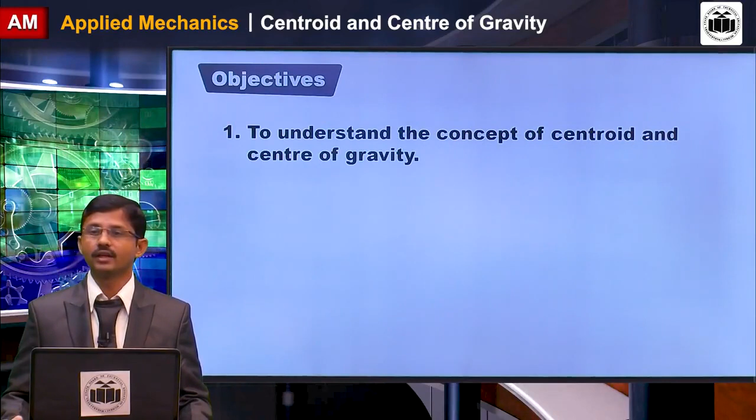The learning objectives of this topic are to understand the concept of centroid and center of gravity, then calculate the centroid of different composite lamina, then calculate the center of gravity of different composite solids.

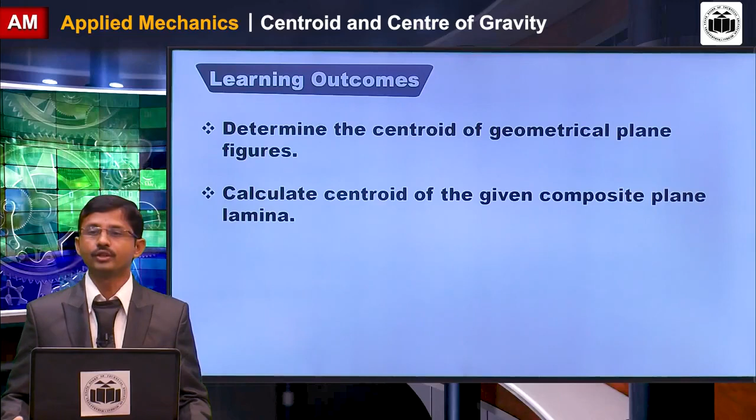The learning outcomes of this topic are: determine the centroid of geometrical plane figures, calculate the centroid of given composite plane lamina, determine the center of gravity of given solids, and determine the center of gravity of given composite solids.

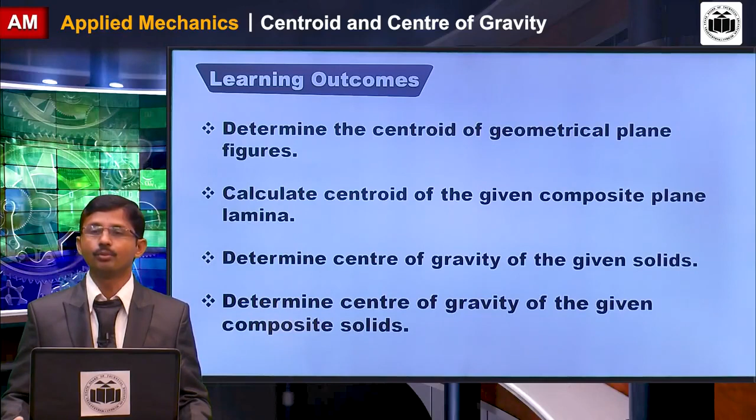The utility and relevance of this unit with respect to real life include children playing seesaw in the garden, a man balancing his body on a wire rope, elephants standing on a ball in the circus, and a boat balancing in the water.

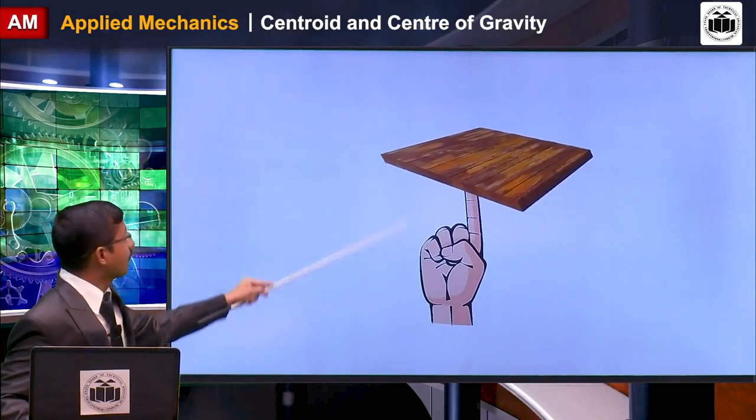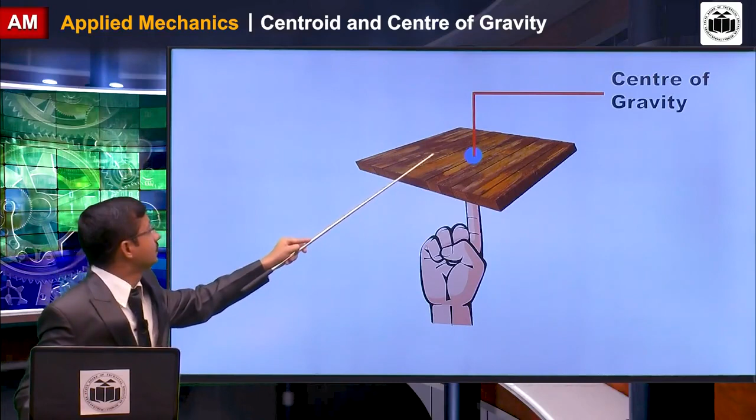For utility relevance, if you consider a cardboard and try to balance it on your fingertips, it will move left and right, and it will balance at a particular point. That point is called the center of gravity of that particular cardboard.

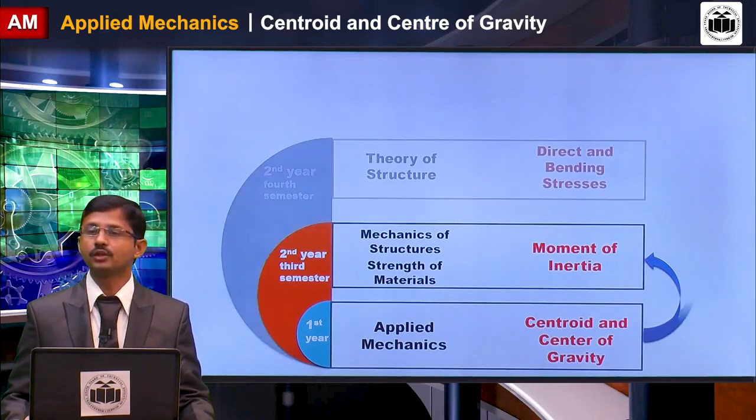The relevance of centroid and center of gravity is important for solving problems on moment of inertia in mechanics of structure and strength of materials. This topic is also important for calculation of direct and bending stresses, slope and deflection in theory of structures, and for stability analysis of structure in design of steel and RCC structures.

The prerequisites of centroid and center of gravity are: in mathematics, you should know the calculation of area and volume; in applied mechanics, you should know the force system, resolution and composition of forces, and equilibrium is also important as a prerequisite for this.

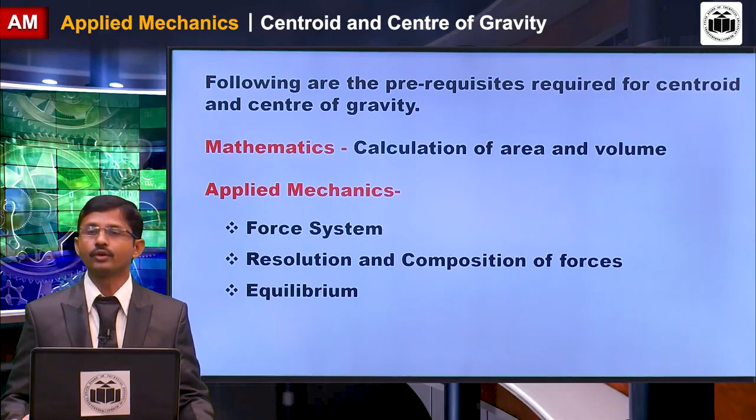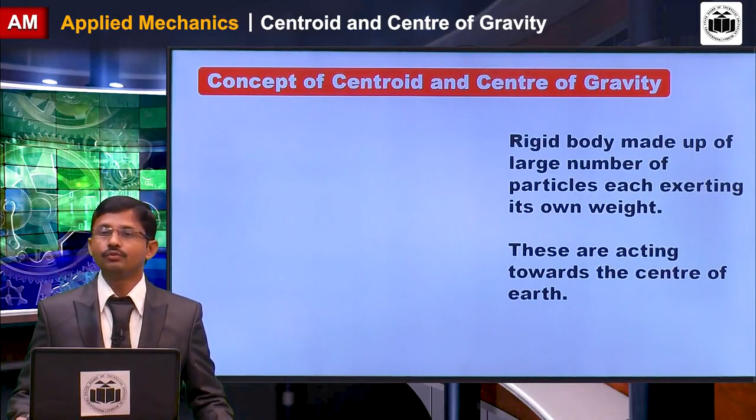Now we will discuss the concept of centroid and center of gravity. If you consider an irregular shaped lamina having a number of particles exerting its own weight, these weights act towards the center of the earth. If you calculate the resultant of all these particles, you get a point where the resultant of all the weights is concentrated.

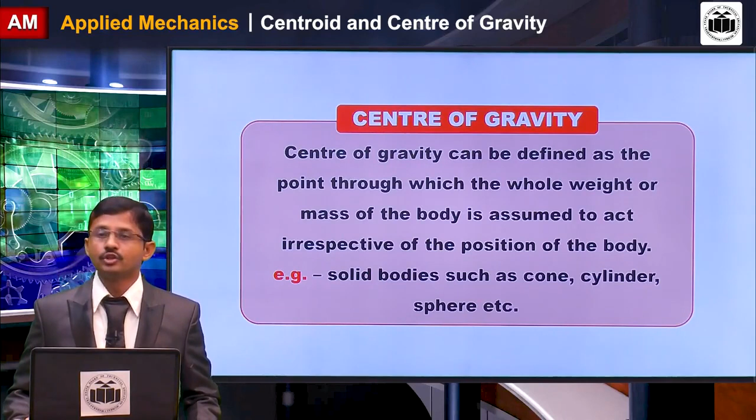So this point is called the center of gravity of that particular irregular shaped lamina. We can define center of gravity as the point through which the whole weight or mass of the body is assumed to act, irrespective of the position of the body. That is called center of gravity. Solids such as cone, cylinder, and spheres are examples for center of gravity.

After center of gravity, the next point is centroid. Centroid is the point at which the entire area of the plane figure is assumed to act for all positions of the lamina; it is called centroid or center of area. So if you take...

...a plane lamina, this is a rectangle having plane lamina. Why is it called plane lamina? Because it has two dimensions, B and D, and the thickness is very negligible. So the weight of this particular rectangle is very negligible, hence we have to find out the centroid of this particular rectangle.

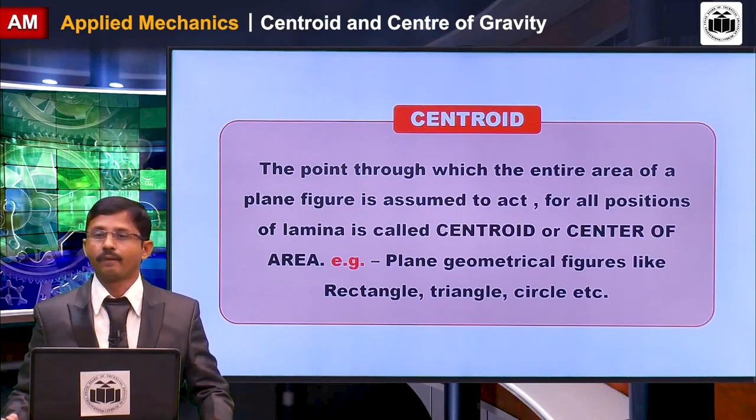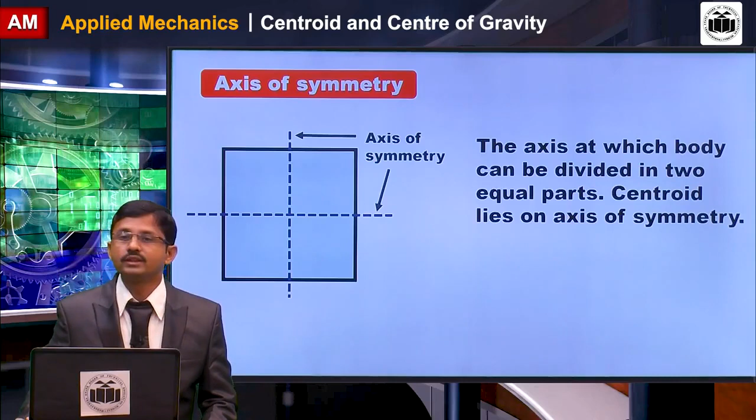So we will move to the next important point, that is axis of symmetry. The axis of symmetry is: if you take a plane lamina, like this rectangle, and divide it into two equal parts, then the centroid of that rectangle acts exactly on the symmetry of that section. Here we have shown the axis of symmetry for that. This concept is very important to locate the centroid of a particular lamina.

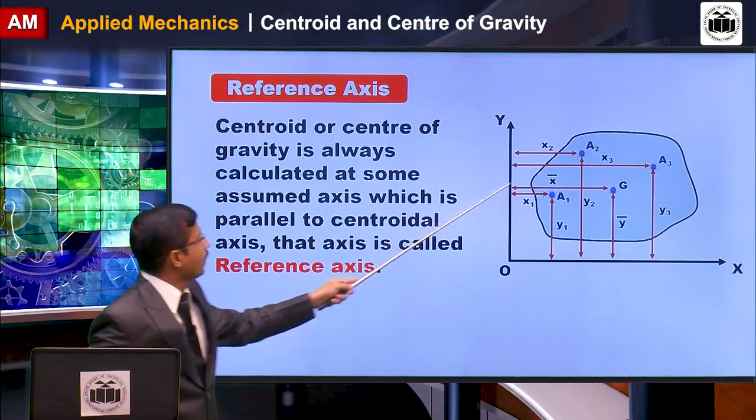Now we will discuss the reference axis, which is also important. In this, you have to assume OX and OY as the reference axes, and from that reference axis you have to calculate X bar and Y bar for individual figures as well as composite figures. This reference axis is very important for locating the centroids.

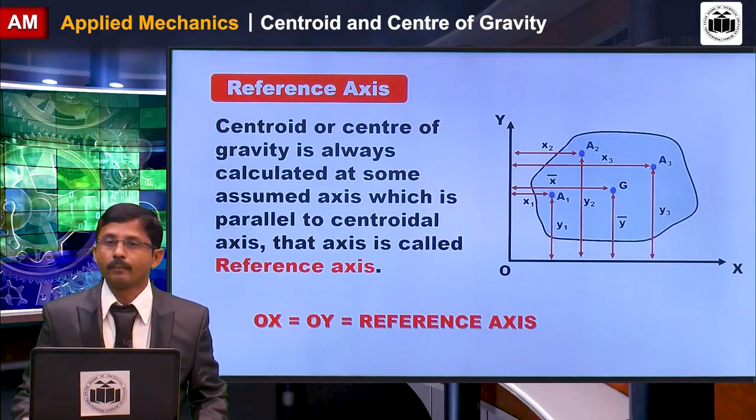Now we will discuss some geometrical figures, formulas for the geometrical figures. So the first is the rectangle. Rectangle is having two dimensions, B and D. If you multiply B into D, you will get the area, and its centroid is located at a distance B by 2 and D by 2 from the rectangle for X bar and Y bar respectively.

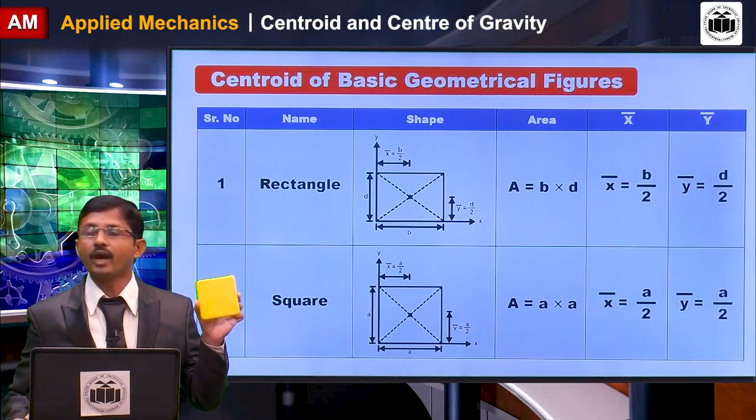Then we will discuss regarding the square. Square is having two same dimensions, A, and both the dimensions are A. So you can find out the area as A into A, and its X bar and Y bar is also same, that is A by 2.

So the next figure is a triangle. Triangle is having area 1/2 base into height, and the X bar is located at a distance B by 3 from the Y axis and H by 3 from the base.

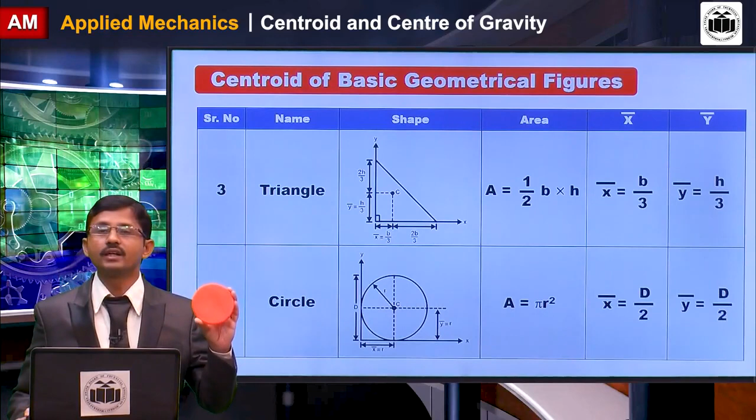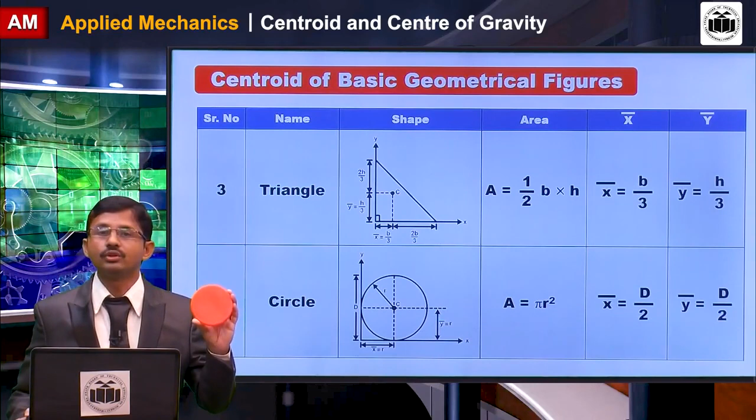Then the next important figure is a circle. The area of this particular circle is pi r square, and you can calculate the X bar and Y bar. This is symmetrical about both the axes, hence its value is D by 2, that is the diameter. D is nothing but the diameter of the circle.

Students, do you have any question? Yes, sir, I have one question. Differentiate between centroid and center of gravity.

So it is a nice question. Centroid is defined for a plane lamina having two dimensions, and center of gravity is defined for a body having three dimensions, that is length, breadth and depth. So in centroid, the total area of that particular figure is concentrated at a point. In case of center of gravity, the total weight or mass of that particular body is concentrated.

We will move forward for centroid of composite plane figures. For this you have to consider two axes OX and OY as the reference axis, and draw an irregular shaped plane lamina, considering three areas. First area is A1, with distance x1 from Y axis and y1 from X axis. For area A2, the distance is x2 from Y axis and y2 from X axis, and for A3 it is x3 from Y axis and y3 from X axis.

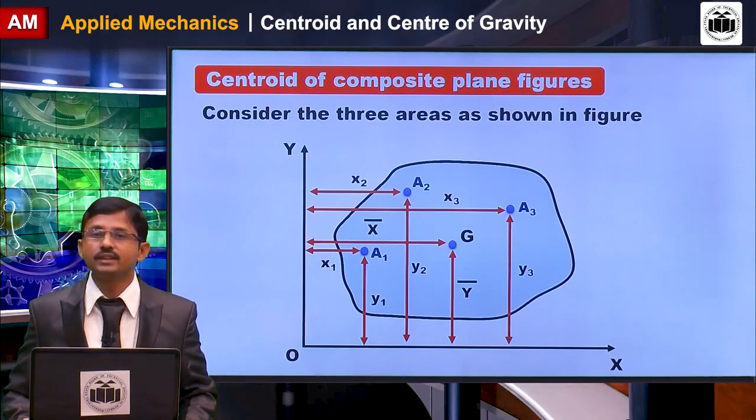Using this particular lamina, you can find the centroid of that plane lamina as x bar from Y axis and y bar from X axis. For this calculation, the reference axis is important, and using this we derive the equations for x bar and y bar. So we have discussed A1, A2, A3, x1, x2, x3, and y1, y2, y3.

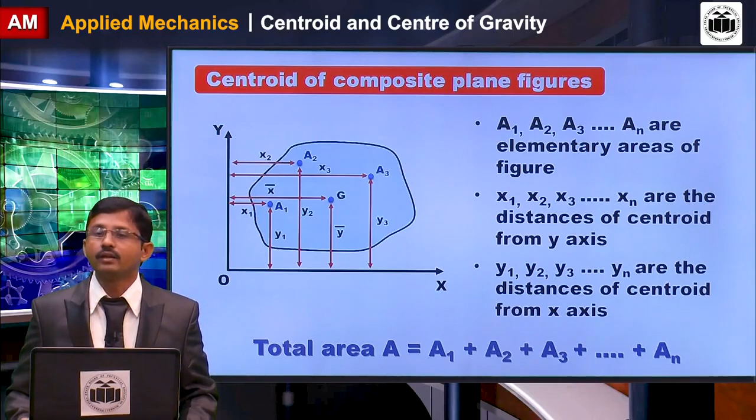Then you can calculate the total area A1, A2, A3 up to AN, and using Varignon's theorem, that is algebraic sum of the moment of individual areas about any axis of reference is equal to the moment of composite area about the same axis. Taking the moment along OY axis, you get x bar as A1 x1 plus A2 x2 plus A3 x3 up to AN xn, divided by total area.

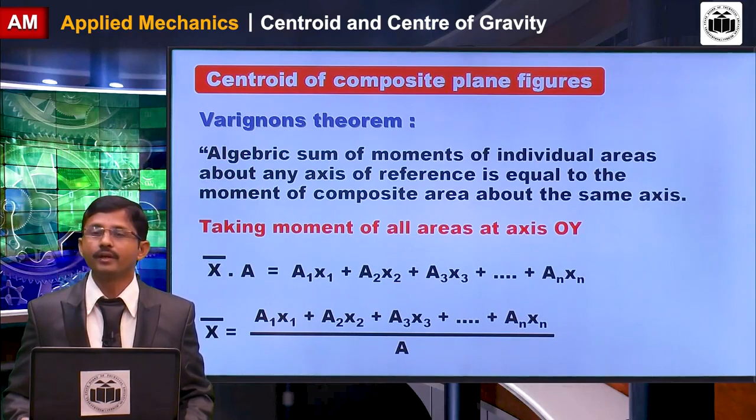Then taking the moment along the OX axis, you get y bar as A1 y1 plus A2 y2 plus A3 y3 up to AN yn, divided by total area. Using these two equations, centroid of composite plane figures can be found out.

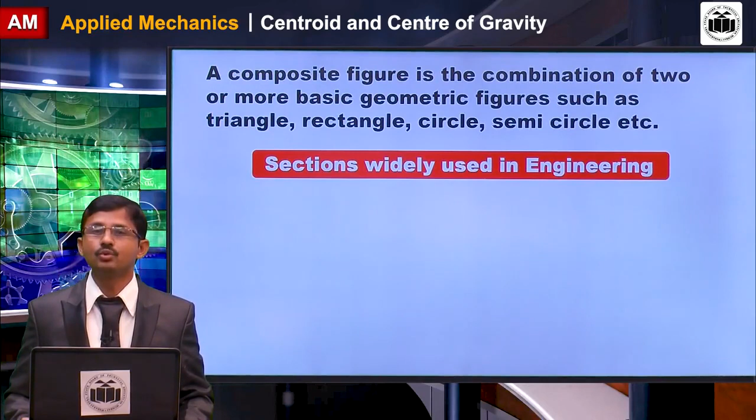Now we will discuss composite figures. These are nothing but the combination of more basic geometric figures such as rectangle, triangle, circle, semicircle. Some of the composite figures widely used in engineering are equal angle sections, unequal angle sections, equal and unequal I sections, channel sections, T sections, and trapezoidal sections for retaining wall, gravity dam, and earthen dams.

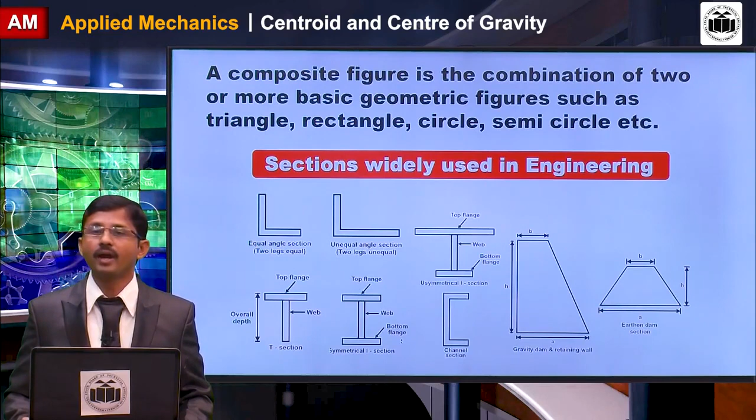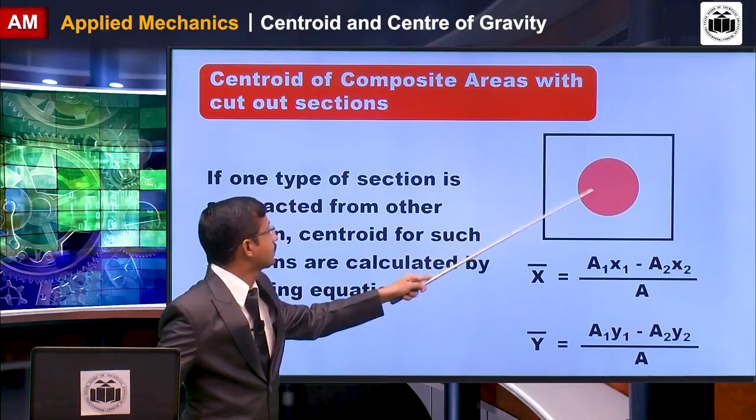Then we will move forward for centroid of composite areas with cut sections. A cut section is when a smaller area is subtracted from a bigger area. Centroid of such sections is calculated using the equation: x bar equals A1 x1 minus A2 x2 divided by total area, and y bar is A1 y1 minus A2 y2 divided by total area. Here you have to remember to subtract the area of the circle from the rectangle, so the second term in the equation should be negative.

Students, do you have any question? Yes. How to calculate the centroid of cutout sections?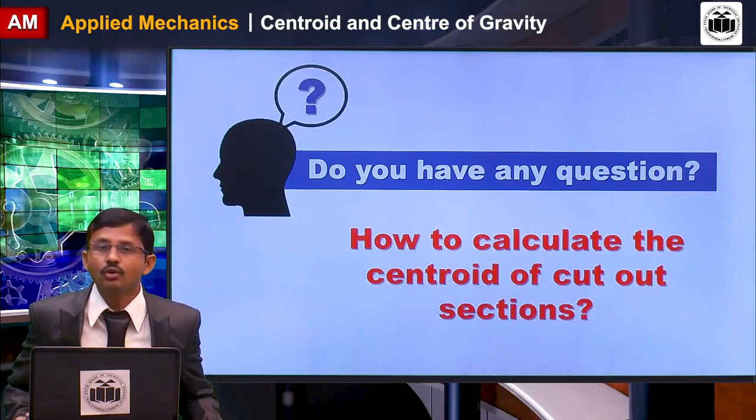So it is a nice question. Cutout section is nothing but we are subtracting a smaller section from bigger sections. So at the time of calculation of centroid, the moment of smaller section is considered as negative. You have to subtract the moment of smaller section from the bigger section, and you will get the centroid of cutout sections. I think you understand the answer. Thank you.

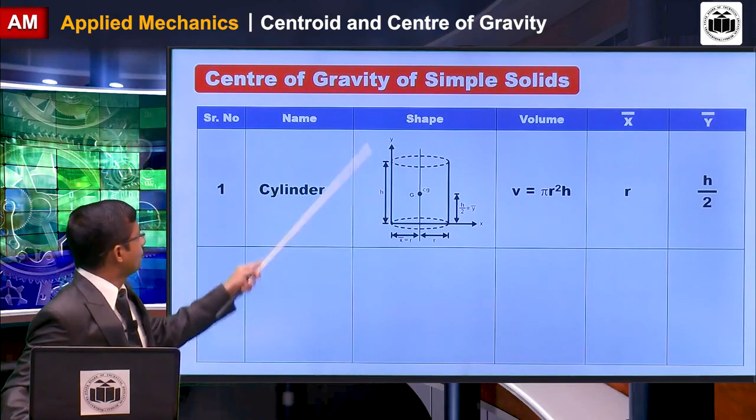So students, now we will discuss center of gravity for simple solids. Our first solid is a cylinder. It is having 3 dimensions, so area is there and height is there. For this you have to calculate the volume. The volume of this cylinder is pi r square h, and the x bar for this cylinder is r from the y axis, and y bar is h by 2 from the x axis.

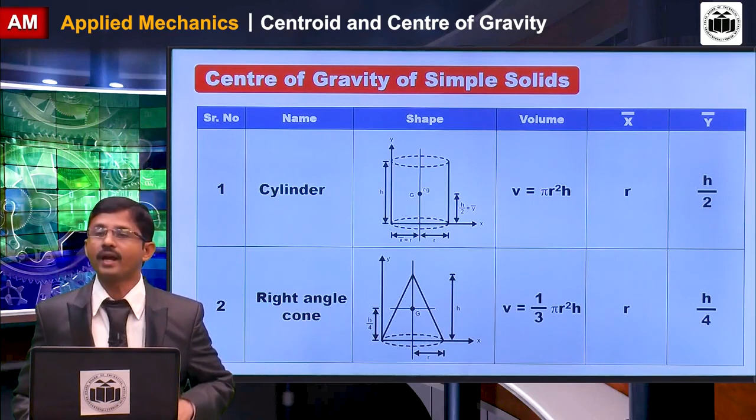Then next is a right angle cone. This cone is having a circular area at the bottom and there is a height. So volume of this cone is calculated as 1/3 pi r square h. The x bar of this cone is r from the y axis, and the y bar is h by 4 from the x axis, and r is the x bar from y axis.

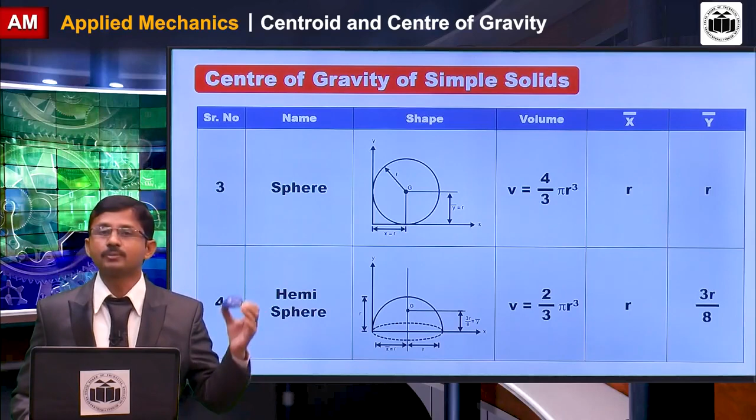Then hemisphere. Hemisphere is nothing but it is the half of the sphere. So the volume of this sphere is 2 by 3 pi r cube, and the x bar of this particular sphere is r from the y axis, and from the x axis the y bar is 3r upon 8.

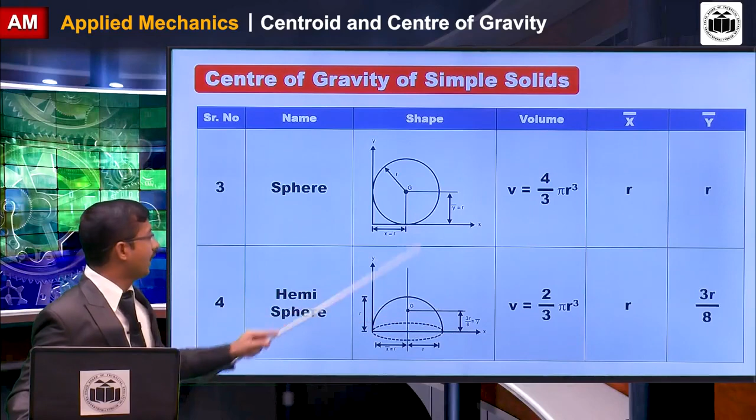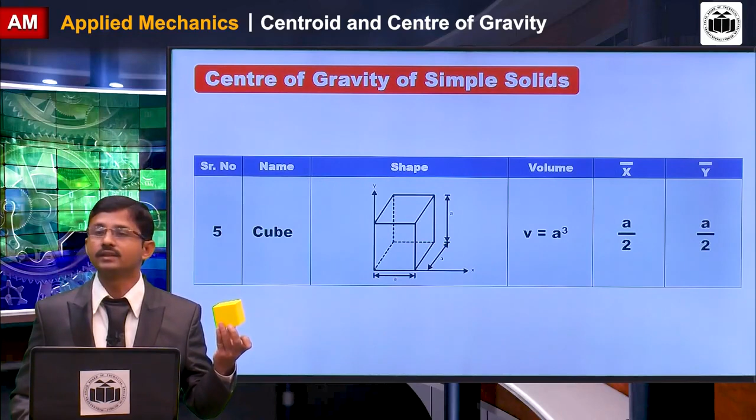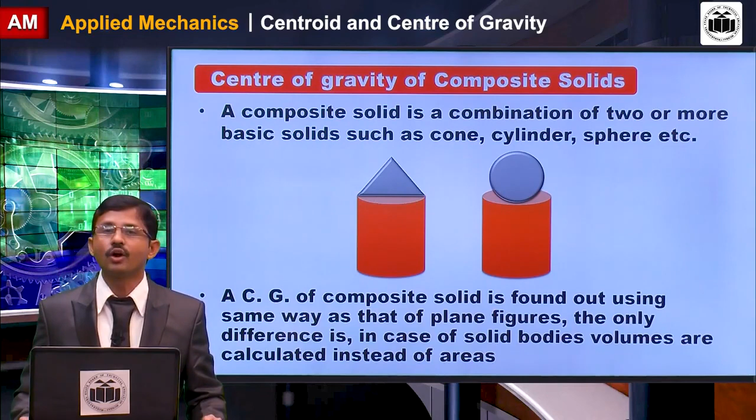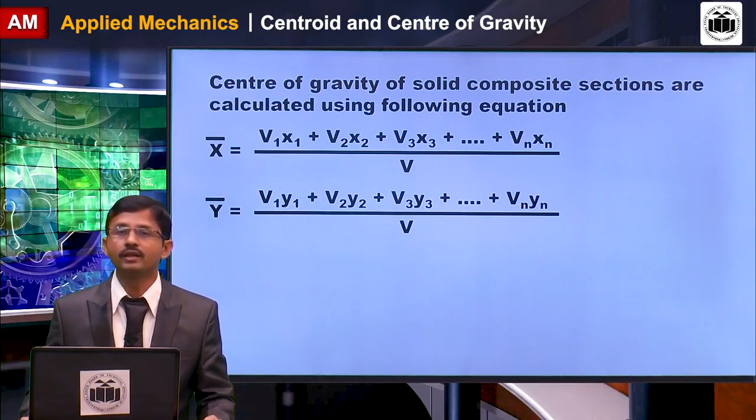This can be calculated, that means center of gravity of composite solids is found out using the same way as that of plane figures. The only difference is in case of solid bodies, volumes are calculated instead of areas. So the center of gravity of solid composite sections are calculated using equations: x bar is equal to v1 x1 plus v2 x2 plus v3 x3 up to vn xn divided by total volume. Then y bar is equal to v1 y1 plus v2 y2 plus v3 y3 up to vn yn divided by total volume. So v1, v2, v3 are the elementary volumes of the figure, and x1, x2, x3 are the distances of CG from y-axis; y1, y2, y3 are the distances of CG from x-axis.

So here you have to consider volume. In centroid we are considering the area. So we can calculate total volume V is equal to V1 plus V2 plus V3 up to Vn.

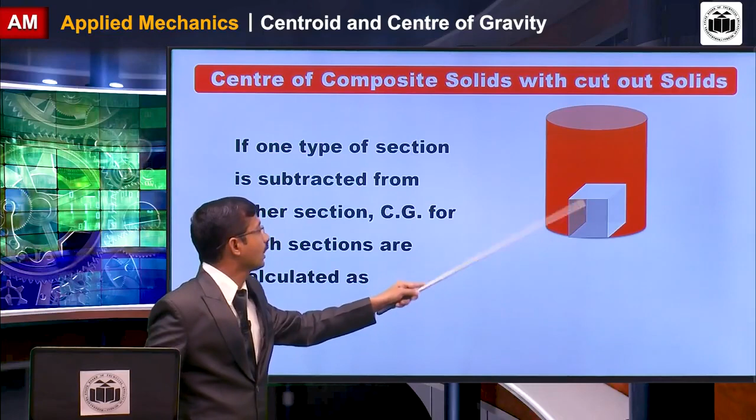Then we will discuss center of gravity of composite solids with cut out solids. So we have to discuss the cut solids. That means what you have to do: there is a cylinder, and from this cylinder you have to subtract or remove this particular cube. So this is called cut solids.

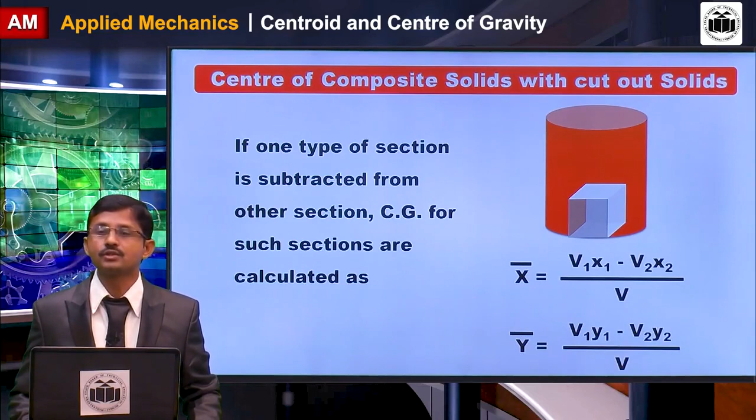So if one type of section is subtracted from other sections, the CG for such sections are calculated using the following equations. x bar can be calculated as v1 x1 minus v2 x2 divided by total volume, and y bar can be calculated as v1 y1 minus v2 y2 divided by total volume. Here in the second term, what you have to do is subtract V2 x2 and V2 y2 because we have to remove this particular cube.

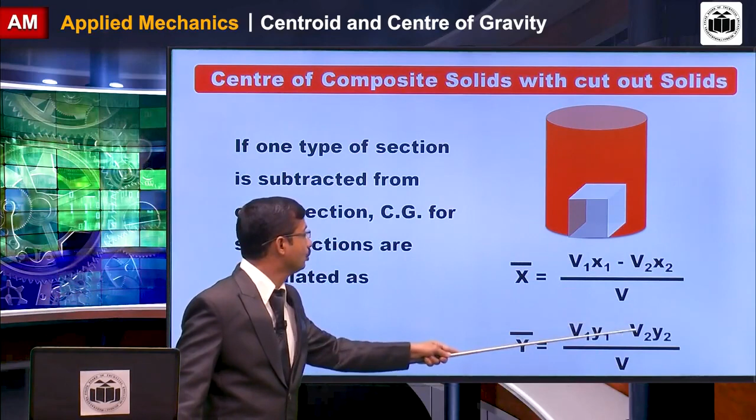Students, do you have any question? Yes, sir, I have one question. What do you mean by frustum of a cone?

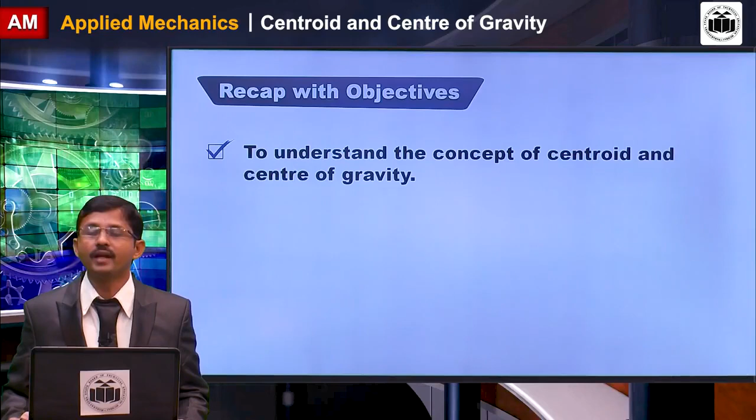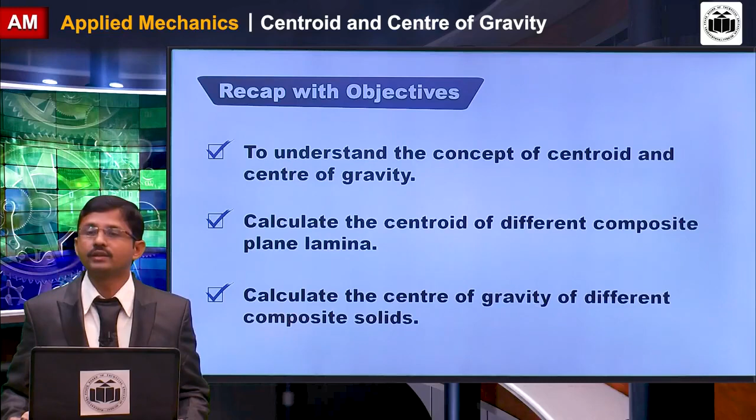So students, we have covered these objectives. First, to understand the concept of centroid and center of gravity. Then we have calculated the centroid of different composite lamina. Then we have seen how to calculate the center of gravity of different composite solids. So students, now you are fully competent to solve the problems of centroid and center of gravity.

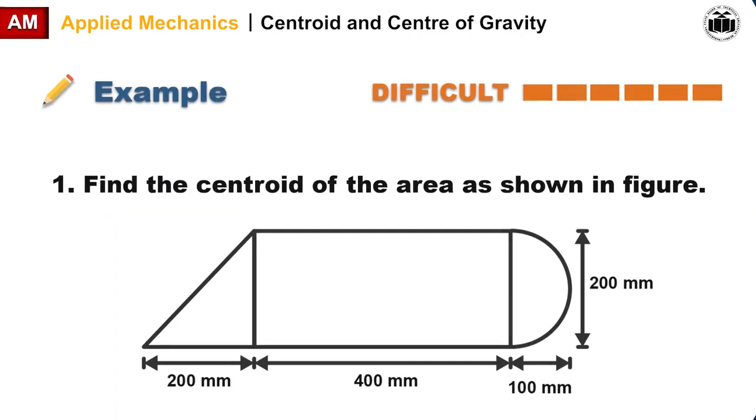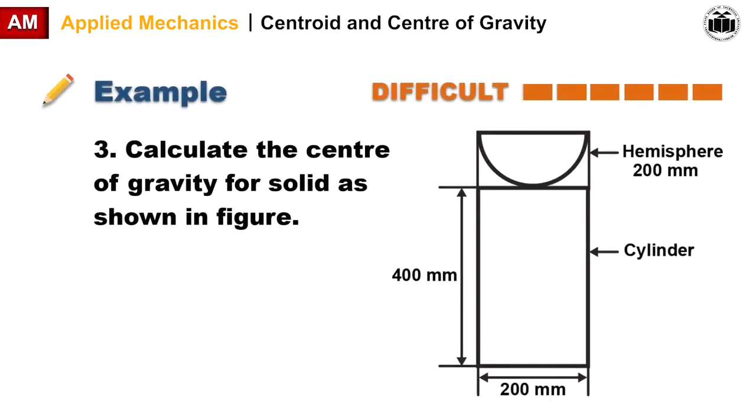So a worksheet is given below. Try to solve it. The solutions of the worksheet are provided for cross verification.

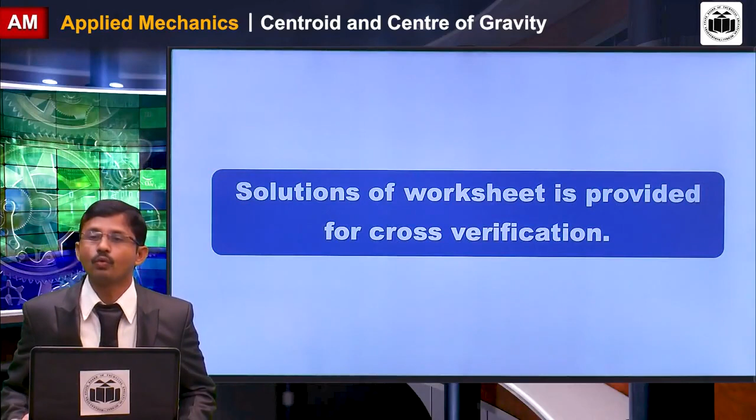Let's see the solution of this particular problem. First of all, you have to convert this composite figure into three diagrams, that is triangle, rectangle and semicircle.

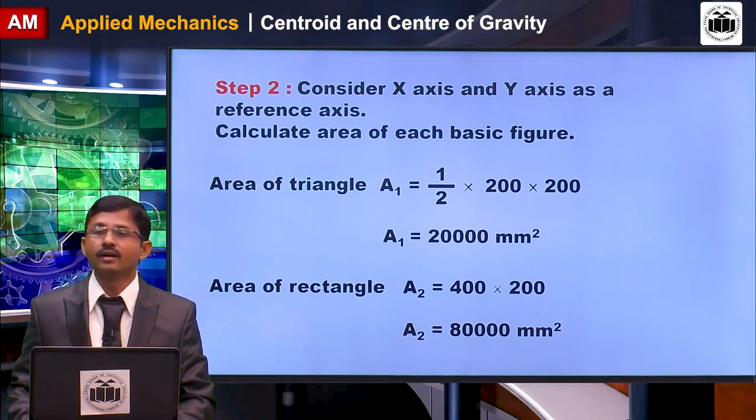Then consider x and y axis as the reference axis and calculate the areas for triangle, rectangle and semicircle using the basic formulas. Calculate the area of the composite figure, that is A1 plus A2 plus A3.

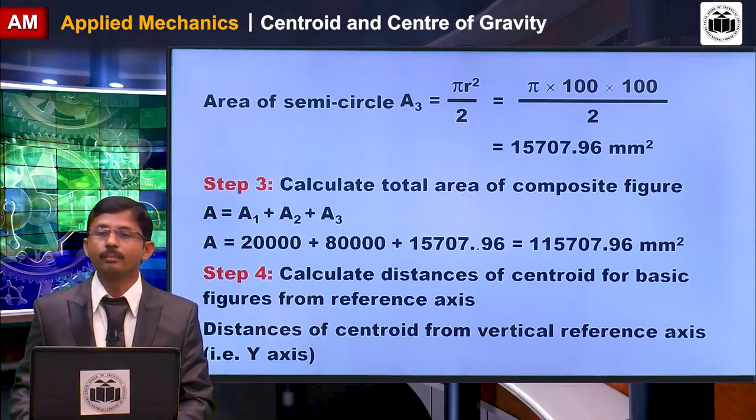Then you have to calculate the distances of centroid for basic figures from the reference axis. This particular step is very important for this problem because students are making mistakes while calculating x1, x2, x3. So here x1 is nothing but the CG of this particular triangle from the y-axis.

So x1 is calculated as 200 minus h by 3. Then you calculate x2, so this x2 is 200 plus 400 divided by 2, that is the CG of this individual rectangle.

Then you have to calculate x3. So x3 is calculated as 200 plus 400 plus 4r upon 3 pi. So this 4r upon 3 pi is nothing but the centroid of the semicircle.

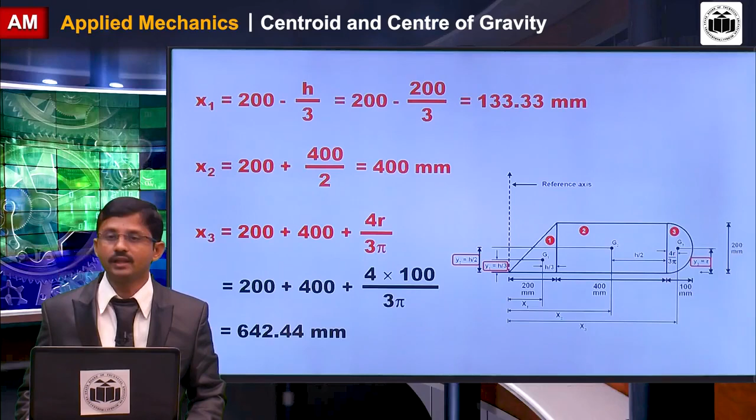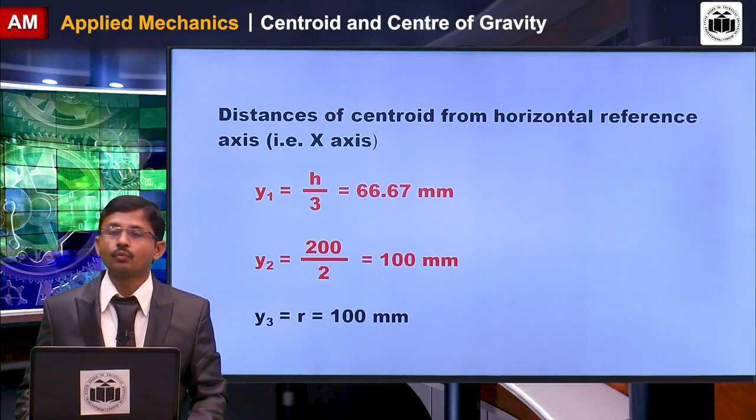So from this you will get x1, x2 and x3. Then you have to calculate the distances of centroid from the x-axis, that is y1 as h by 3 for the triangle, y2 is 200 by 2, and y3 for the semicircle where radius is equal to 100 mm.

Then you have to calculate the centroid of the composite figure from the y-axis, that is x bar, using the equation a1x1 plus a2x2 plus a3x3 divided by area. After doing the calculations you will get x bar as 386.822 mm from the y-axis. So you have to do the calculations properly on the calculator so there won't be any mistake.

Then we have to calculate the centroid for the composite figure from the x-axis, that is y bar, using this equation, and you will get y bar as 94.24 mm from the x-axis.

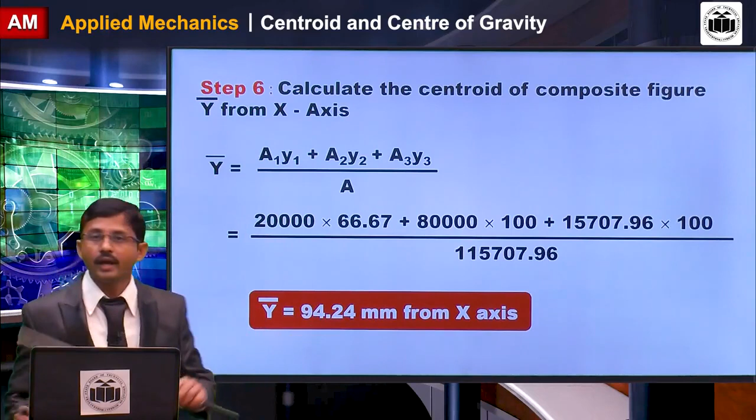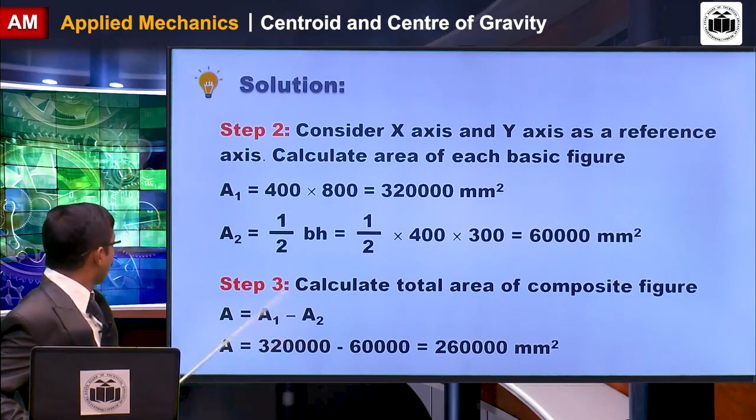So after considering x and y axis, you have to calculate the areas A1 for rectangle and A2 for triangle. Then calculate the area of the composite figure. Since this is a cutout section, you have to subtract A2 from A1, so you will get the total area.

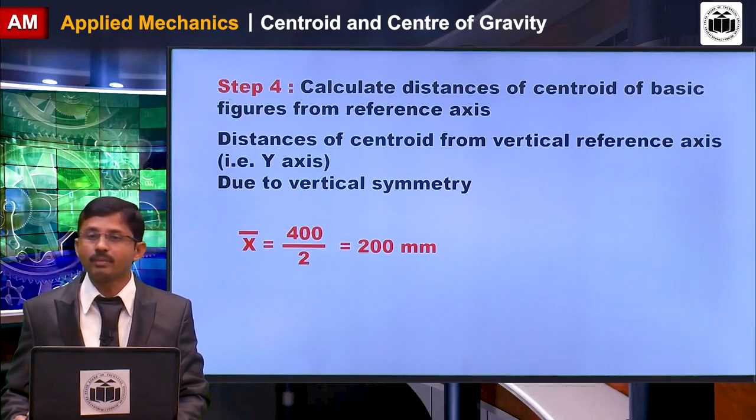Then calculate the distances of centroid from the y-axis. Due to symmetry, since this diagram is symmetrical about the y-axis, x bar is calculated as 400 by 2, which is 200 mm. This is the axis of symmetry, so directly you get x bar as 200.

Then you have to take care in calculating y1 and y2. y1 is considered as 800 divided by 2 from the base, and y2 is calculated by subtracting h by 3, that is 1 by 3 into 300, so that is 100, from 800, giving y2 as 700.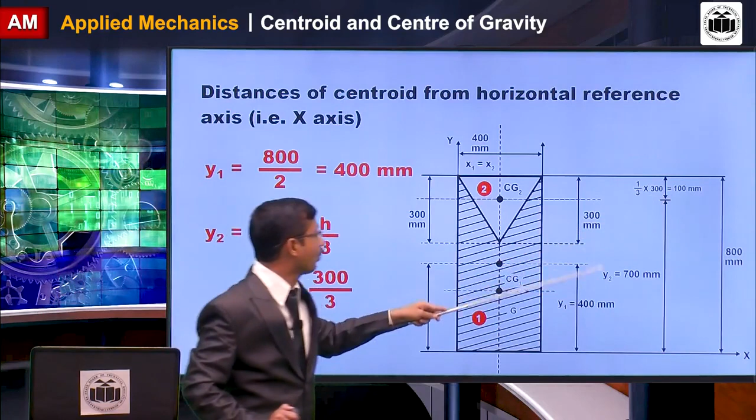Then you have to calculate the centroid of the composite figure from the x-axis, that is y bar, equal to a1 y1 minus a2 y2 divided by area. So you will get y bar as 330.77 mm.

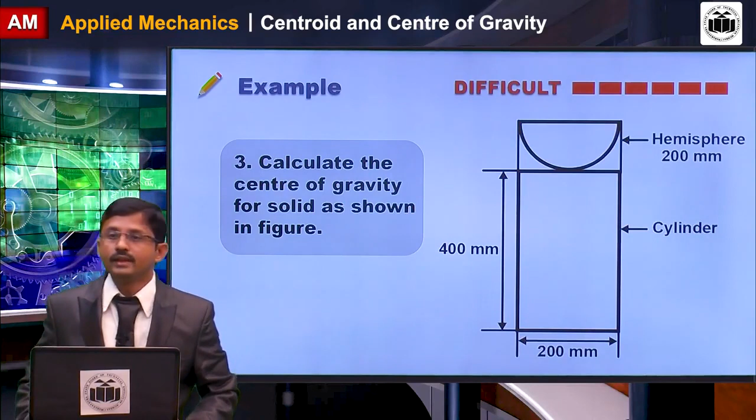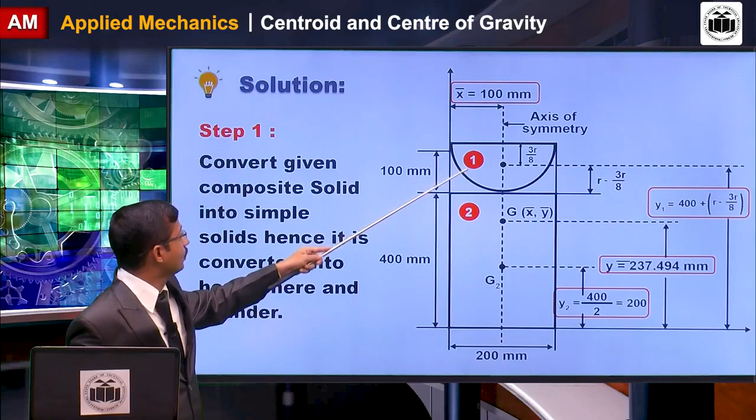Then we will see the next problem. It is having composite sections, that is one is a cylinder and second is a hemisphere kept inverted on the cylinder. So you have to convert this figure into two parts, that is part 1 is hemisphere and part 2 is a cylinder.

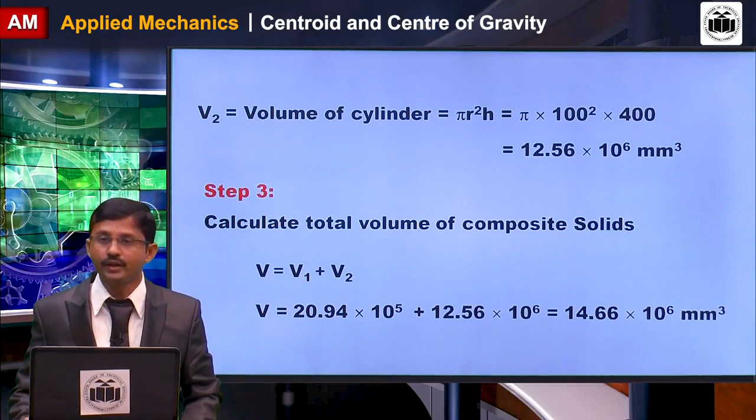So this is a problem of solid sections. Here you have to calculate the volume of hemisphere, that is 2/3 of pi r cube. Then you have to calculate the volume of cylinder as pi r square h. Then you have to calculate the total volume of composite solid, it will be V1 plus V2, and you will get the total volume.

Then the next important step is you have to calculate the centroid of individual figures and composite figures. Here there is an axis of symmetry parallel to the y-axis, hence your x bar will be directly obtained as 200 divided by 2, that is 100 mm.

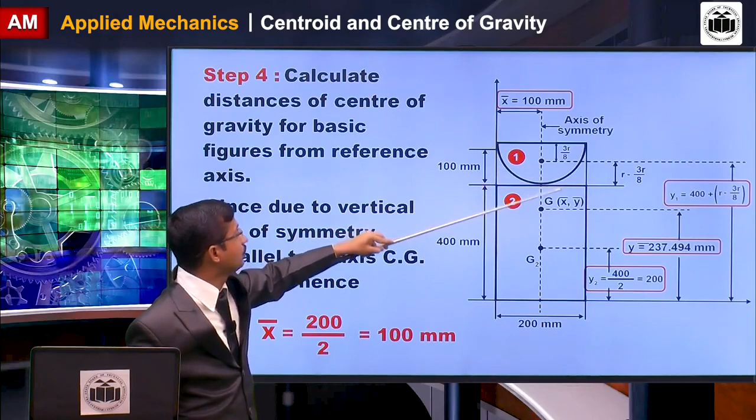Then we can calculate the distances of the hemisphere, this is the distance we have to find out, so this is y1. y1 from the x-axis we have to find out as 400 plus, what we have to do here, you add r minus 3r upon 8. So CG from the base for hemisphere is 3r upon 8, hence total y1 you will get as 400 plus r minus 3r upon 8.

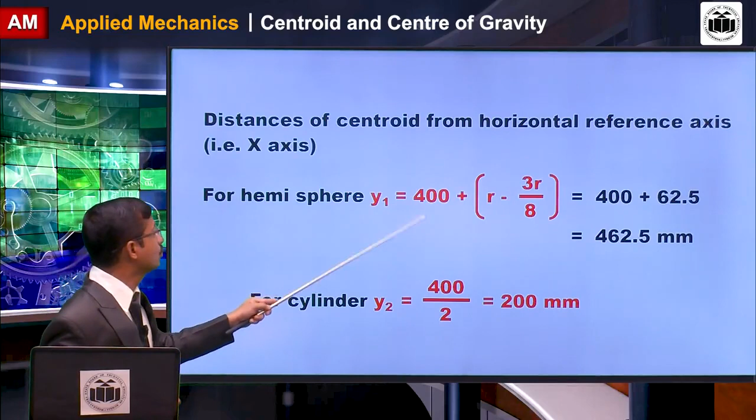Then you have to calculate y2 as total 400 divided by 2. In this problem, this particular term is very important, that is 400 plus r minus 3r upon 8. Here the students are doing mistakes, so you have to be careful at the time of calculation of y1 and y2.

After that you can calculate the y bar from the x-axis, that is V1 y1 plus V2 y2 divided by total volume. So you will get the y bar as 237.5 mm.

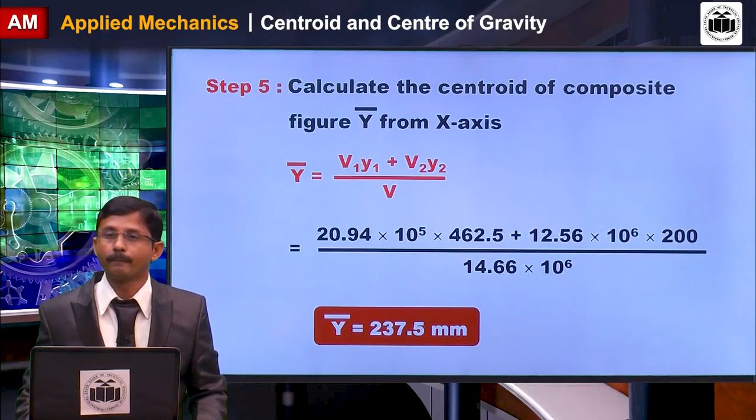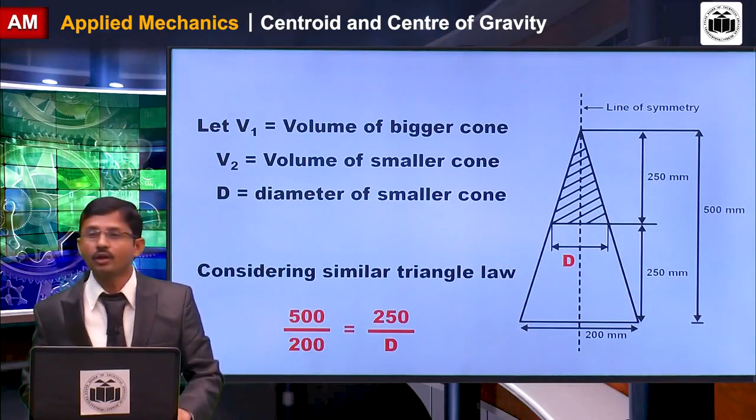Before calculation of V1 and V2, first of all you have to calculate this particular D, using the similar triangle law, that is 500 divided by 200 is equal to 250 divided by D. You will get the diameter of the smaller cone as 100 mm.

Then you can calculate the volumes of the bigger cone, that is 1/3 pi r square h will be the volume of the bigger cone, and you can calculate the volume of the smaller cone similarly, that is 1/3 pi r square h, and you will get the total volume.

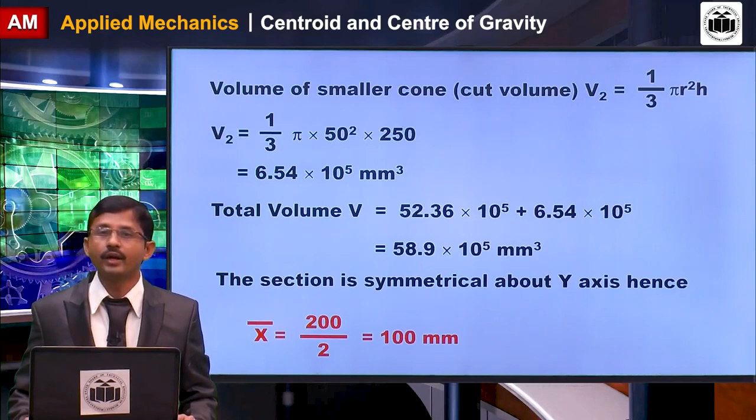This particular solid is having symmetry about the y-axis, hence we will get the x bar as 200 by 2, that is 100 mm. Now you have to calculate the center of gravity from the x-axis.

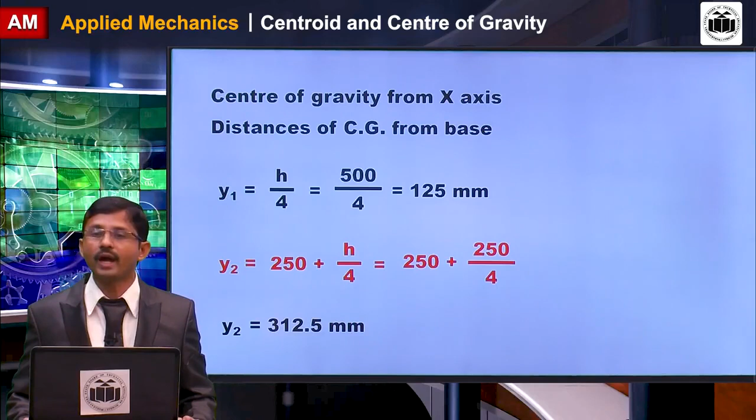So first you calculate y1 as h by 4 for the bigger cone, and y2 for the smaller cone as 250 plus h by 4, where h here is the height of the smaller cone. So you will get y2 as 312.5 mm.

After this you have to calculate the y bar. Since this is a cutout section, the equation will become V1 y1 minus V2 y2 divided by total volume. So you will get y bar as 98.24 mm.

Now we will see some tips and tricks with respect to centroid and center of gravity. The centroid is for a two-dimensional figure, hence area is considered to calculate the centroid. Center of gravity is for a three-dimensional figure, hence volume is considered to calculate the center of gravity.

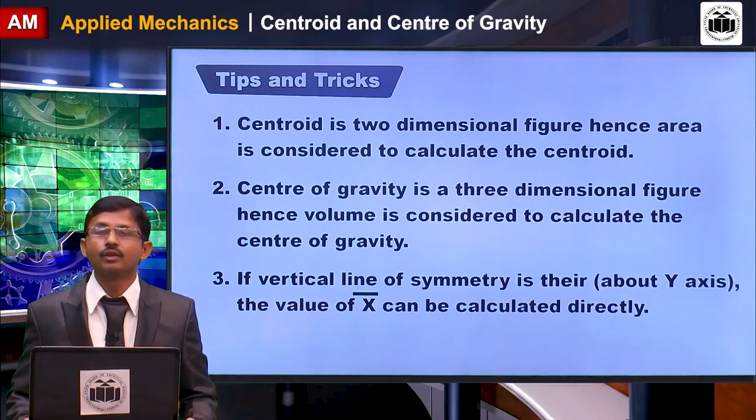If the vertical line of symmetry is there about the y-axis, the value of x bar can be calculated directly. If the horizontal line of symmetry is there about the x-axis, the value of y bar can be calculated directly. The centroid or center of gravity is nothing but the first moment of area or volume about the reference axis. And you have to remember the basic formulas of solid sections as well as formulas regarding areas.